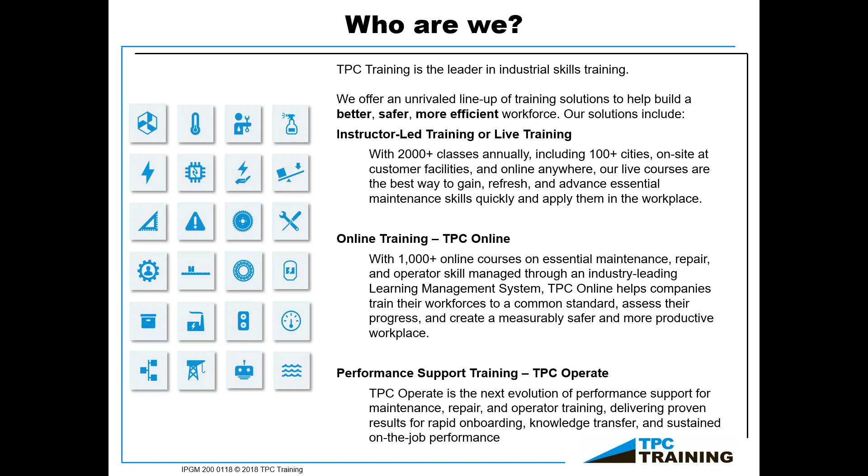My training involved everything to do with AC, DC, solid state technology, digital type stuff, communications gear, radar. And of course, my title was fire controlman - had nothing to do with putting out fires, but probably everything to do with starting fires. Our motto was to put ordnance on target on time.

Using the various weapon systems the Navy had to do that, which was supported by the electronics for the computer systems, electromechanics, motors to drive the system, hydraulics, pneumatics, that kind of thing, and obviously the ballistics associated with that as well.

I ended up getting out of the Navy because my son was born in 2007 and I got out in 2008 - that's why I chose my family over the military. When I got out of the Navy, I picked up a job quickly at Exelon Nuclear, where I was a maintenance and engineering instructor there.

Pretty much doing what I'm doing now, except at the power plant it was more along the lines of prepping maintenance teams for our outages. In the 5 or so months in between outages, my job was to make training customized for their needs, building mock-ups if necessary, and then conducting training accordingly.

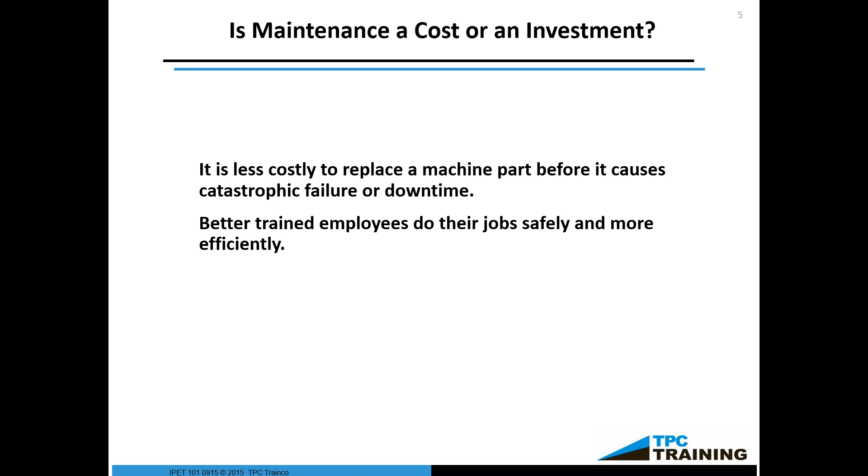Maintenance-like training, as I mentioned, is an investment. So the idea is to have the maintenance done in such a way to prevent it from breaking at a time that is extremely inconvenient, or in a time that will be very expensive. Part of understanding how a maintenance program is set up is making sure that those who are maintaining the maintenance program and those who are using it understand what is expected and the purpose of that maintenance program. In the end, what it boils down to is to overall save your company money and to allow your company to be more efficient in general.

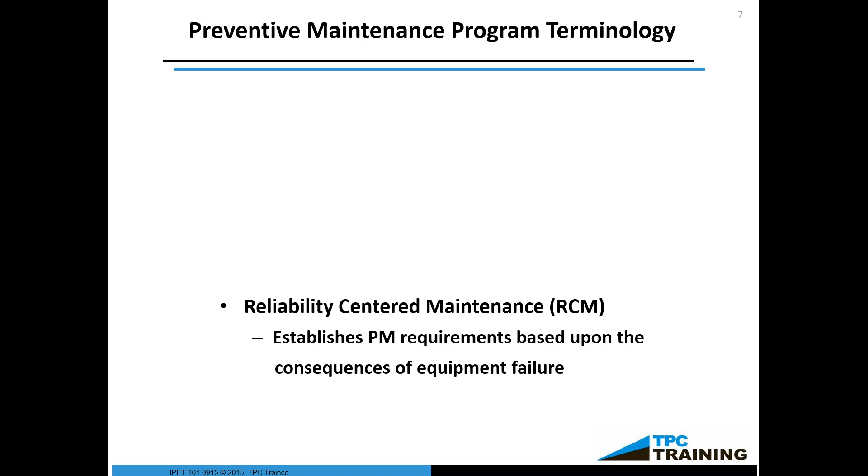Especially from a production point of view, this gives managers time to schedule a shutdown so that it's more convenient, rather than waiting until something breaks and having to shut everything down, forcing technicians to hurry through it to get it fixed as quickly as possible. The idea with reliability-centered maintenance is to allow you to schedule when the maintenance is supposed to happen, specifically making corrective maintenance more preventative. That way there's flexibility with production management and process management.

All preventive maintenance programs are made of 6 parts. First and foremost, you have to define what constitutes responsible and qualified personnel. The various codes out there generally agree that what makes a person qualified is that they have the necessary knowledge, skills, applicable safety training, and with electrical safety, what was recently added in the 2018 70E is that they know how to do a risk assessment.

In many cases, keep in mind that doing the risk assessment doesn't mean they need to sit down, have a full-blown meeting, and do all the math and predictive algorithms that sometimes come with it. No, the risk assessment just means he or she and one other technician get together and say, yes, this right here is a 480 volt panel.

That's how you do a risk assessment, with the idea of bringing to the front, to everyone involved, these are the hazards associated with it, and this is what we're going to do to assess and mitigate the associated risks. Next is, of course, the survey and analysis of electrical equipment.

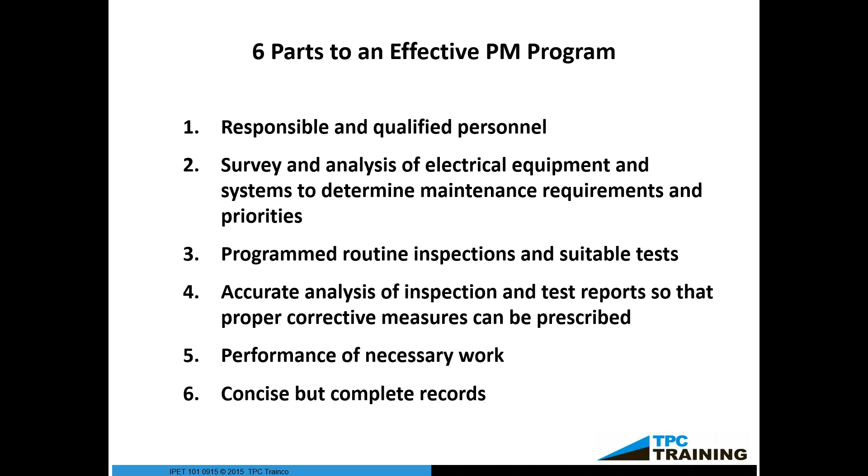By maintaining records, this allows you to see, okay, under these conditions, I can see at these regular intervals or whenever something occurs that this is when I get the problem. So this is where the importance of maintaining good maintenance records comes into play.

As far as planning goes, what's really important, as I mentioned before, is compiling a list of all your equipment. Someplace—the most modern form would be your computerized maintenance management systems, your CMMS.

There should be a giant, exhaustive list of every single piece of equipment that any one of your technicians will ever touch. This includes things like your tools, PPE—those should also be on the list of what needs maintenance.

Then, of course, with this maintenance, determining what is most critical, because this will determine if in the event you have conflicts, what the technician needs to focus on first. Or from a management point of view, to allow you to say, okay, I know I had you scheduled doing this, but this is more critical because if we don't get this fixed, it's going to affect everybody else.

And then, of course, develop a system for keeping up with what needs to be done—whether it be regularly scheduled, whether it be predictive, some type of system, so that at the very least, you can enable your technicians to be somewhat autonomous because they can follow a pattern established by your program.

And then lastly, of course, is the purpose of why TPC exists: to be able to train your people for the work that needs to be done. So when it comes to maintenance and troubleshooting, we try our best as a training program to address the market and the industry as broadly as we can.

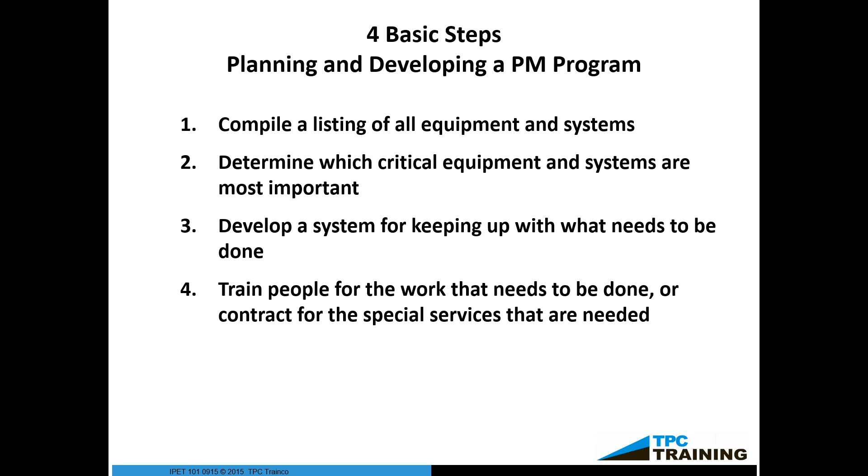Other things would include hydraulics. And if you go through any of these maintenance programs, I almost always talk about electricity, because it's one of those things that, as I mentioned before, can be one of the more dangerous things. Depending on your level of expertise, there's still a little bit of a learning curve associated with that. So these things in this general course are pulled from our myriad of specific courses.

Another thing with this whole topic is developing a walkthrough inspection checklist. This is from the perspective of facility maintenance, mainly because that's one of the common things we cater our training to. One of the common tasks assigned in facility maintenance is a daily checklist, rounds, or whatever you want the technician to look for at the beginning of every day, or once a week, whatever your program is.

And with this comes your checklist, to minimize the day-to-day hazards. A lot of times this is as simple as walking through the various parts of your plant, allowing the technician to use all of their senses, rather than just seeing something—being able to hear it and smell it. Any one of us who are technicians, especially one example I like to use—

When you're sitting in your car, have you ever been driving down the road and hear something in your car, or think it might be your car, so you shut the radio off and kill the HVAC system just to listen, because you're listening for that something that might be off. Many technicians, that's how they do things—they can hear that stuff.

We referenced NFPA 70B, but one thing I want to point out is that NFPA 70B is one of many maintenance guidelines. What I mean is NFPA 70B is general maintenance, but if you want specific maintenance, like how to maintain fire protection systems, that's NFPA series 13 and 25—13 for installation, the baseline, and 25 for how to do the maintenance. And if you work at a data center, that's NFPA 75 and 76, and there's NFPA 110 for generators, et cetera.

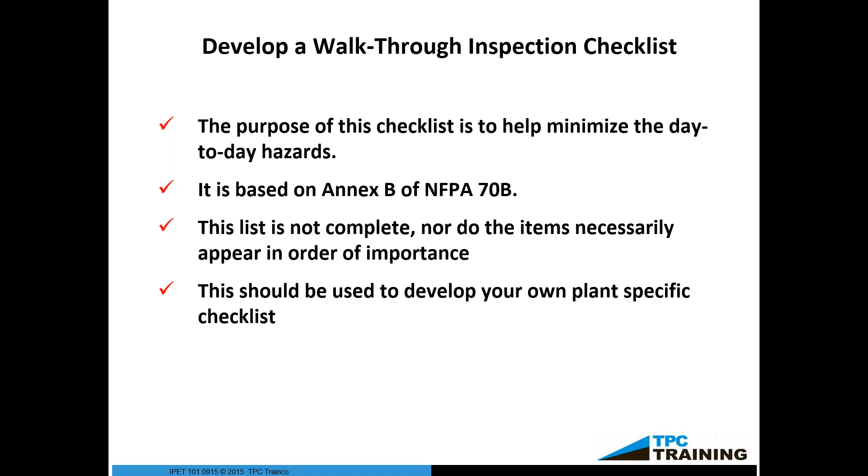We asked this question here because these are some things to point out that should be part of your maintenance program. We've already discussed what constitutes a qualified worker.

How complete is your electrical safety program? And not just your electrical safety program, but your safety program in general. Smaller facilities will probably have it in just a couple of binders in an office someplace. Larger facilities will have a whole safety department. This is the whole purpose in life, to maintain this stuff.

And of course, PPE. We talked a bit about PPE. That has to be on there because PPE is maintained like anything else. So you should have a list of all the PPE and how it's being maintained. This includes things like if you expect the uniform your technicians wear to be considered PPE. That's one of the reasons we have uniform contractors like Cintas and Aramark, because that's one of the things they do, is make sure your uniform's adequately maintained to still constitute as PPE.

And of course, check meters for quality. That can be a day-to-day thing for each one of your technicians. You can also have a meter shop for calibration, that kind of thing.

One of the things that commonly gets overlooked is the updating of the drawings. A good maintenance program should have the ability to update the drawings as the equipment gets changed or added. In a perfect world, and I say this because there's a difference between perfect and reality, you'd have up-to-date drawings at your disposal at any given time of the day, readily available in case anything happens. That would be the goal as far as prints are concerned.

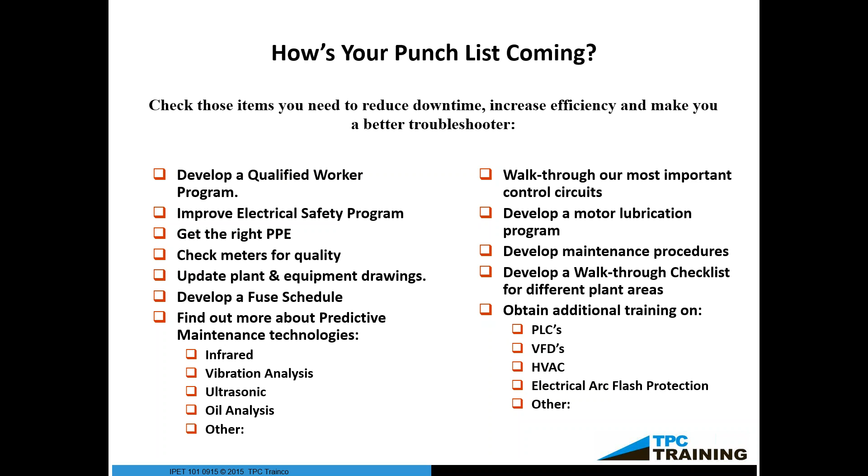Things like a high-speed camera - how long have high-speed cameras been around? That's what's allowed scientists to actually view the arc flash occur. So that is an example of technology and our understanding of the science of electricity, and how it has evolved even just within the last 10 years.

Practice for electrical equipment maintenance comes down to NFPA 70B, and part of this is also maintaining the components of your electrical maintenance. Now, one of the most prominent components of this is, of course, your policy regarding work on energized equipment.

Now, I do understand that sometimes it may be necessary, but my personal opinion, and what I recommend to every single one of my classes, is to never work on energized equipment. The reason for that is because electricity behaves in mysterious ways as it goes, and as a result you're increasing the probability for a mishap to happen. Electricity is something to always respect and take into consideration when dealing with any equipment that works on electricity, which for most of us is almost all of our equipment.

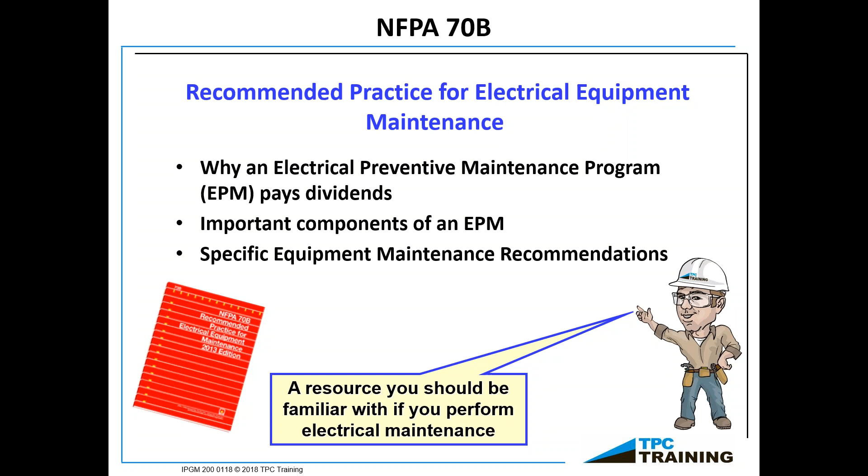So one of the most important components, I think, of an electrical preventive maintenance program is the policy, which many companies already have, to not work on energized equipment. And if you were to take my class, I'd be happy to tell you any situation you give me - you say, well, we have to work on it while it's energized - I'll give you a safer way to do it. Even though the law states that when it's infeasible or will introduce additional hazards, there are still ways to establish an electrical safe work condition with those in mind. That's pretty much the big point I make in a lot of my classes.

All right, so the last part of this is troubleshooting. I built a lot of the programs associated with troubleshooting with a lot of examples, with the intent to discuss the operation of the equipment based on limited knowledge. Because a lot of us as technicians have the expectation that if it's broke, go fix it, and whether we know anything about it or not is not generally a good excuse, because sometimes things happen and that technician's the only guy that's available.

But the cool thing about it is, especially for those who take my classes, I try to equip those guys with the idea that you can fix anything, because a lot of this stuff has the very same principles across the board on each piece of equipment.

And these same principles can be applied across the board. Same principle applies in all this with how to troubleshoot. And so, as you can see up here, knowing your system and equipment.

And so from a management point of view, one thing to take into consideration, especially if the technician is inexperienced with that specific equipment, is to give them the time to do the necessary research.

I mean, speaking for myself, I've been a technician for over 20 years now, and when I've been teaching this stuff, if I know nothing about the equipment, generally if I think I can fix it in 20 minutes, I'm going to tell you, give me 3 hours. Because I'll run across something that I didn't know before.

But the advantage of that, though, is next time I come back to it in the future, I'm going to know a lot more about the equipment because I took the time on the onset to get to know my equipment.

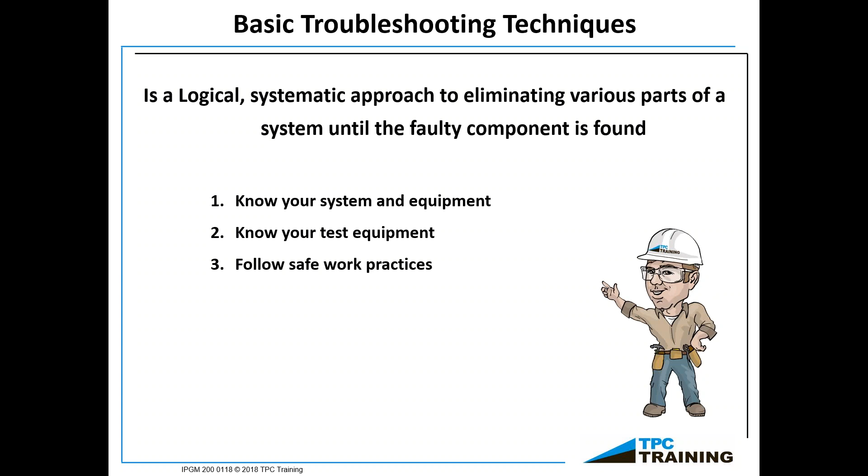And then, of course, going into following safe work practices. And really what I go to in this is to squash the idea that just because you're troubleshooting does not mean you have a get out of jail free card in reference to working on energized equipment. You still need to follow safe work practices, even though troubleshooting is one of those types that says, yeah, I can work on energized equipment if I'm troubleshooting. No, that's not your ultimate get out of jail free card. The hazard is still there.

And so that's what this means by following safe work practices. And so one of the things I also talk about is understanding why safety is important. Now, I understand that's a bit controversial, meaning that here's one of my analogies that I use, and I'll tell anybody who will listen to this.

So I use what's called, it's based off Harlow's monkey experiment. In this experiment, what you have is 5 monkeys in a room. In the middle of the room, you have a ladder. At the top of the ladder, you have a set of bananas. And so in the beginning, what ends up happening is all the monkeys start playing King of the Hill, each one trying to fight amongst each other to get to the banana at the top of the ladder.

Now, during this onset, what then happens is that the experimenter will then spray water on all the monkeys to say, hey, no, you cannot go up there after the banana. And so after a while, behaviors establish that not to go after the banana because they'll get punished if they do.

Then the experimenter, one at a time, begins replacing the monkeys with a new one. Now the new monkey, the first thing it does is tries to go to the top of the ladder and go after it. Now the other monkeys that have been there a while beat that monkey up because they're saying, hey, if you do this, we're all going to get punished. And so this repeats until all 5 monkeys get replaced.

Now at the end of this experiment, what ends up happening, and you can tell this based on the behavior of the monkeys, is the monkeys don't even realize that the ladder is even in the middle of the room. It's as benign to them as some random column in the middle of any room we ever go into. They don't even realize it's there.

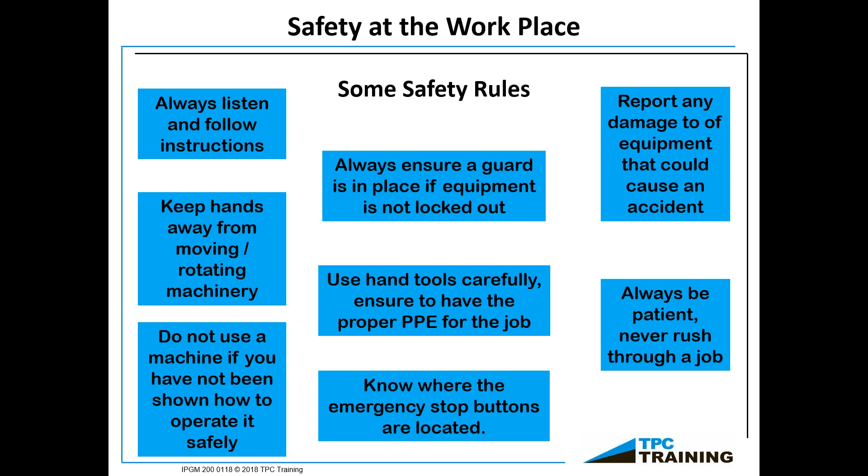I stand by this, because if you've ever worked in the nuclear industry, that's how it is - they're always about step by step, making sure you don't skip a step or do a step out of order, so you don't have a cascading problem. This is one of the reasons the nuclear industry is on record as the safest industry yet - because of this approach to all of their maintenance.

And so also when troubleshooting - you must protect against three hazards when it comes to electricity. We talk about this in this course, which is an abridged version of our already existing electrical safety course.

And so we talk about the three hazards: shock, arc flash, and arc blast. We can't talk about electricity without bringing this up, because these hazards are always a possibility, especially when dealing with higher voltage applications, especially 480 volts and up.

These are things technicians need to be aware of. In my class, whenever you come to any class I teach involving electricity, one of my primary objectives is making sure my students understand the differences between voltage and current, and how those can manifest into conditions of shock, arc flash, and arc blast.

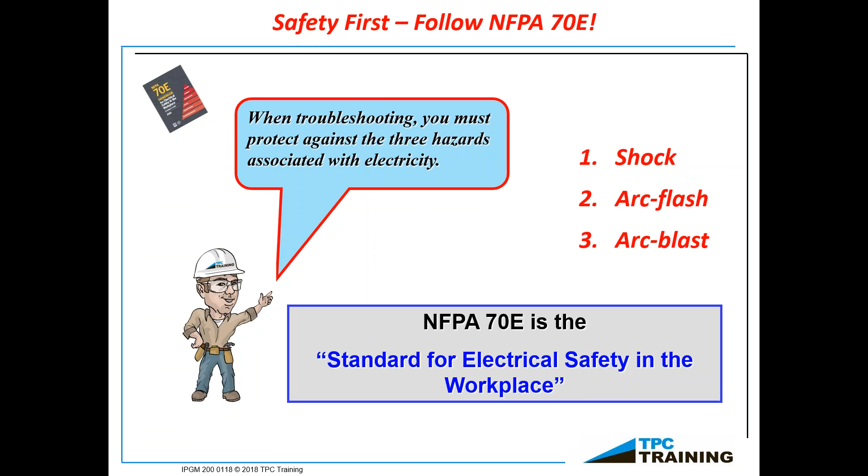Lastly, as I mentioned earlier, this is what many of the code books say constitutes a qualified person - one who has the necessary skills, knowledge, and safety training. As a result, with all of our training, you will see this very pattern: we try to cater our training to fulfill this, giving our students the necessary skills, knowledge, and applicable training. Any of the trainings you come to in our classes will have just those in mind.

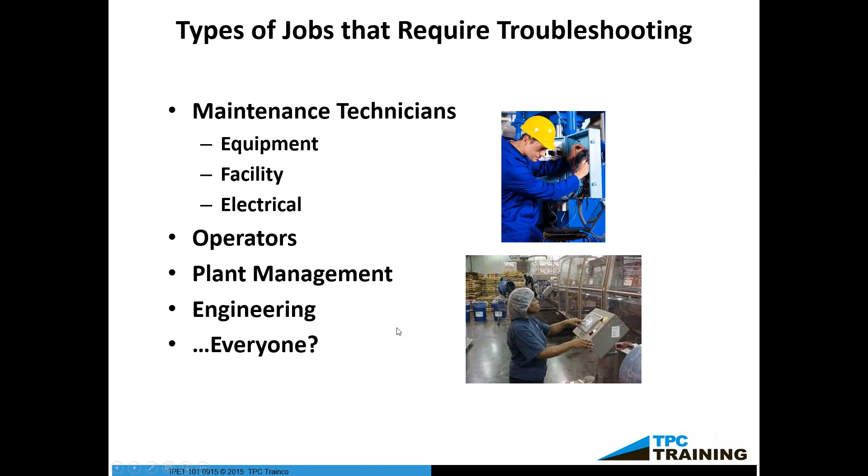Who this pertains to - to kind of show you guys who it applies to - of course your equipment technicians, facility guys, electrical guys, operators that deal with this, plant management, pretty much anyone who has to deal with the process where these hazards are associated.

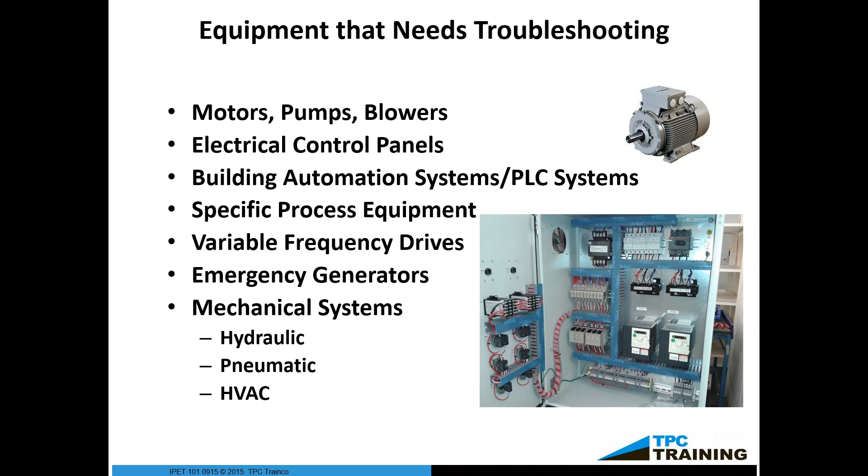The various things we talk about in a lot of our classes, as you can see here, include motors, pumps, blowers, that type of thing, control systems, PLCs, VFDs, emergency generators. We have individual classes for each of these, but this course covers this stuff in general. Most of my exercises are generic, common problems you would see with these, and then of course how to approach it from a very systematic point of view.

In our troubleshooting class, we talk a lot about the stages of this, and it's more about a mindset than anything else. So what it means to investigate the problem, and how important it is to develop a concise problem statement.

Of course, creating a work environment where no idea is a bad idea. Don't shoot down the guy whose idea might seem stupid, because some of us, it could be something really dumb that caused it. Believe me, I've troubleshot enough stuff and you're like, oh, that's what that was. You're kicking yourself because it was something so simple.

And of course, the analysis portion of it is bringing in multiple points of view. One of the things I like to say is if something, you've been working on it for 2-3 days straight and you still can't figure out why it's broke, ask somebody that knows nothing about it. I used to say ask an 8-year-old, because that's back when my son was 8 years old. Someone who doesn't know anything about it will see something that you would have normally missed because you're just so used to seeing it. So that's kind of the idea here, entertain multiple points of view.

And then, of course, implementation of this very idea. So yes, we can talk about ideas and how to troubleshoot things, but a lot of the time a good discussion also includes how we can implement these various things we come up with, meaning, okay, this is the problem, well let's go through the process of how to fix it.

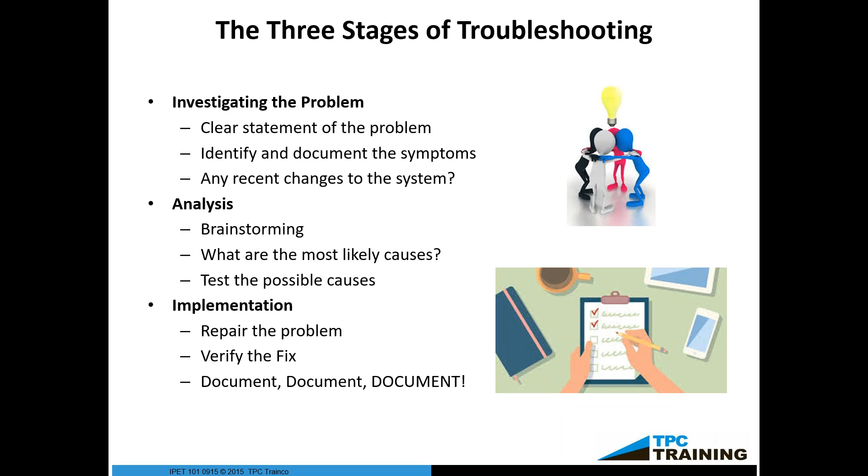So you got to ask yourself, well, is this the best way to go? Now, one guy mentioned, well, you could take off the splash guarding and wheel cover so you can get side access to it. The idea behind this is to have that kind of discussion, bring in multiple levels of experience, and create a plan. Meaning, use the planning portion instead of just what I call Easter egging, where you're randomly replacing parts hoping you'll get it fixed with no plan in mind of how it's fixing it.

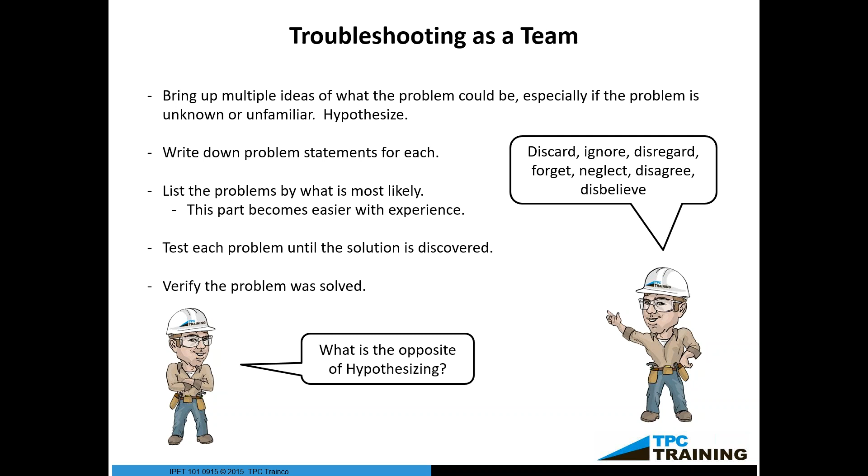So I kind of got ahead here with this, with the whole troubleshooting as a team, kind of what I was talking about. So hypothesize, come up with an idea. I like to think of myself as a scientific type thinker, in that no idea is a bad idea. Because if you come up with a quote-unquote bad idea, all you're doing is eliminating that possibility. Okay, it's not that, then let's move on. We understand how this is. But either way, if you don't hypothesize, you're going to be discarding it, ignoring it, disregarding it, forgetting it, neglecting it, as you can see up here.

So with that being said, we kind of bring it to the end of this. As I mentioned before, this is a class based on general principles. The way I taught this class last week, it was a 4-day class. I had it originally divided into 2 parts, the maintenance section and the troubleshooting portion. I had a handful of students that did both the maintenance and troubleshooting, and a handful of students that came in and joined later for just the troubleshooting portion. So those are the options available to you if you're interested in such things.